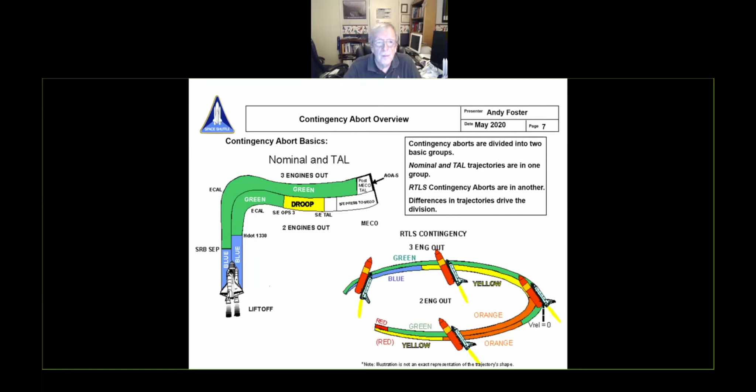Okay, so what I want to talk about now is there were basic objectives for each contingency abort maneuver. Every one of them that you'll look at will either have all of these things in it or most of these things in it. So the first one is for the two engine out cases. You try to use the thrust on the remaining engine to essentially optimize the resulting entry and recover the orbiter. And I say recover the orbiter if it was possible. And we'll talk about when that was.

So you use the thrust in some fashion to either give you a better entry, even if it was going to result in a bailout, or we would use it to try to get us over to a landing site later on in the program. The other thing that would always happen, you had tons of OMS propellant on board, full load you were going to carry to orbit. You wanted to get rid of that for two reasons.

Number one, it would pull the orbiter center of gravity really far aft and actually make the pull-out problem really, really bad. The flight control system wouldn't be able to handle it if your center of gravity was too far toward the back. And so one of the ways to move your CG forward and getting it into a good range for controllability was to dump all that OMS propellant, and we'll talk more about that in a few minutes.

Of course, the number one thing after that is separate from the tank as safely as possible. Especially with some of the three engine out stuff that wasn't always guaranteed, but we really tried to make sure that we got away from the tank and there was no collision. And then of course, depending on where you were in the sky and what had happened to you, you had some kind of resulting trajectory, which could be anything from not too bad to really terrible. And you had to pull out from that and then fly the orbiter to a landing.

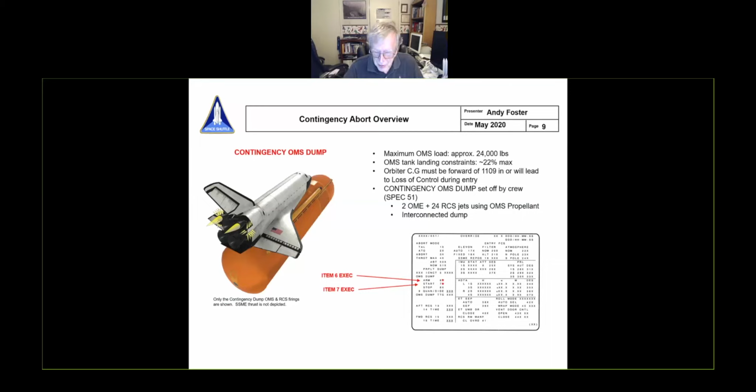Now, this picture over here is really kind of a 2-engine case, but I didn't put the SSME on here just because I wanted you to see the contingency dump and how it's going. And so again, this is really not propulsive. It may be helping you a little bit. It's really to get the weight off the orbiter and to get the center of gravity in the right place. So that's the contingency stuff.

Well, how does that work? If you stop and think about it, the center of gravity for the vehicle is actually down here in the tank. So if I apply a torque here, up, down, however these fire, I can make the vehicle roll around that center of gravity. So it was always essential that you got single engine roll control set if you were in a 2-engine case, and this is one of the reasons why it had to use this kind of a scheme to make it all work.

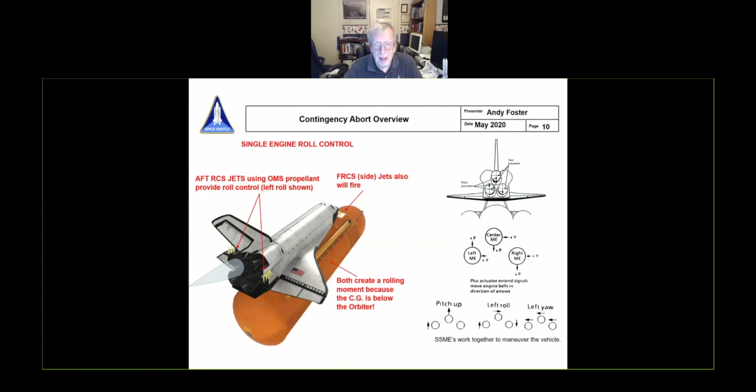Okay, so we're going to start with 2 engines out because those are the only ones that you can really affect any of the trajectory on. And just from a basic big picture standpoint, looking at the nominal type trajectory, there were 2 basic approaches. For the early engine outs, you need to get higher, and you need to do that partially to get the Q bar down low so you could separate off safely, and the other thing was to give more space, if you will, to enter. But the real thing was the Q bar itself.

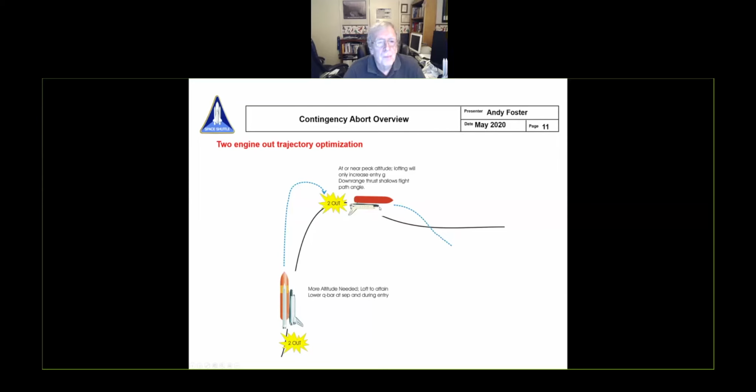And so what we did, and you'll see this in the manual procedures, but this is what the automation did as well. And actually, I'll tell you that when we automated the 2-engine out stuff, all we really did was take the manual procedures and put them in software. They really didn't put a lot of analysis trying to see if they could tweak anything. They just automated it. The 3-engine out, they took a different approach, and it's a lot more fancy and smarter than the 2-engine out scheme.

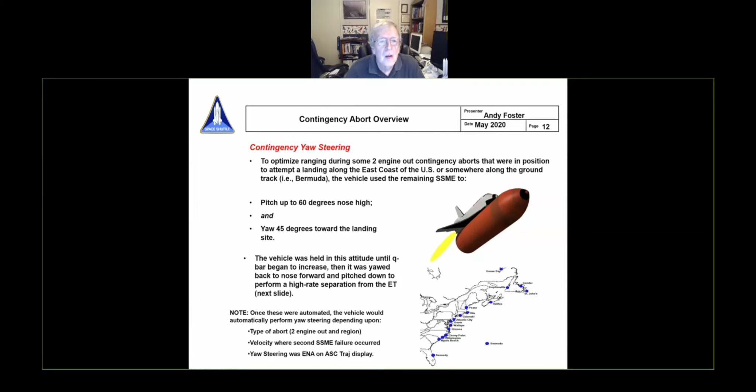ET SEP. There were 2 types of separation techniques that we used for contingency aborts. Now, we talked about the RTLS and using an alpha -2 SEP, and you'll see that we actually brought that over and used it for the contingency aborts. But we also have another one, because some of these contingency aborts would happen in regimes where Q bar was less than the 2 pounds per square foot that you really needed to get the tank off the vehicle using aerodynamic force. And so what we would do with that one is we still had a running main engine, and we would literally pitch forward at 4 degrees per second. And once that was established, the crew would punch the fast SEP switch, which would shut the main engines down and then pop the tank off.

And so really a good analogy of that is we were literally just kind of pitching the tank off using inertia to get the tank away from the vehicle, because as soon as the orbiter comes off, the RCS jets are going to start firing and pushing it away. And hopefully the tank goes on its merry way and it doesn't hit you. The other type of separation when we had Q bars that were 2 or higher was just to pitch down and hold alpha -2, shut the engine down, SEP off, just like we would for an RTLS.

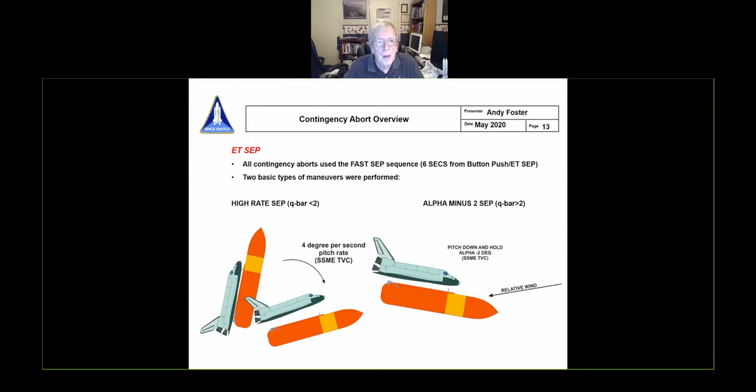Once I've got the tank off, just like an RTLS, the next thing you're going to try to do is pitch the nose up to a high angle of attack to recover lift as quickly as possible. Now, because we're in a contingency case and because we're dealing with much higher flight path angles and aerodynamic forces and G levels, we're going to try to recover lift a little faster than we do for RTLS. So we actually, depending on the Mach number, would pitch up as high as 58 degrees. And again, it might pitch a little bit lower than that. It was Mach number dependent on exactly where it would go.

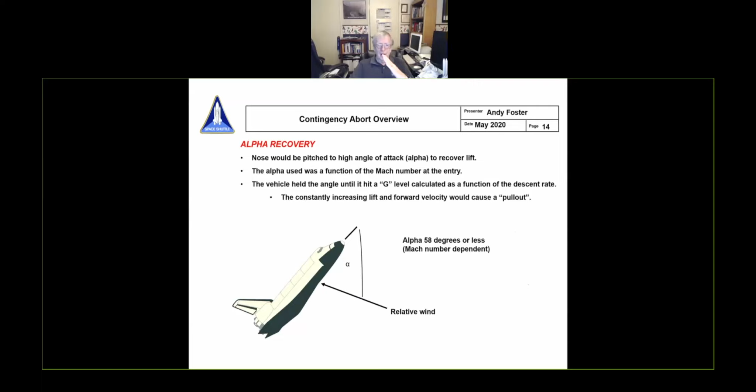But you'd pitch up and you just simply hold that alpha. And as the orbiter started falling into the atmosphere, lift would start increasing. That would automatically start kind of a pull out, and the G levels would start going up.

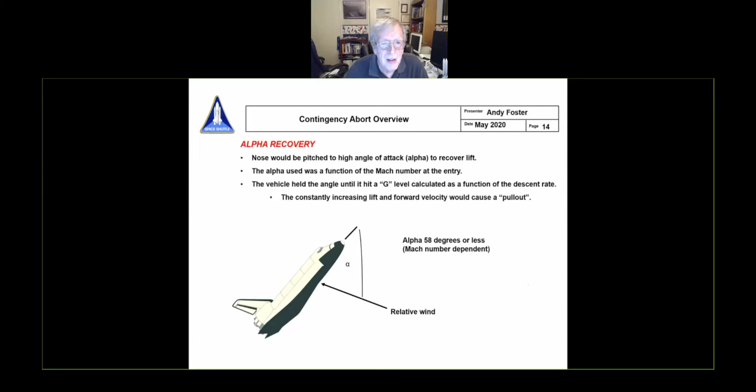And so once the G level hit whatever you were going to use for a maximum value, and actually the vehicle calculated that, at 1 G, it snapshotted how fast you were falling. We call that the altitude rate, or H dot. And it would essentially calculate from that the G level that it was going to use for the pullout.

It would pick the highest one that it could. If it's picking a high number, it's probably going to tell you that you're also going to have a lot of Q bar as well, because you wouldn't be pulling that much G if you didn't have to. And that's the trade-off that you always make. If you pull more G, you're trying to use up more of that aerodynamic force and put less load on the vehicle from an aerodynamic standpoint.

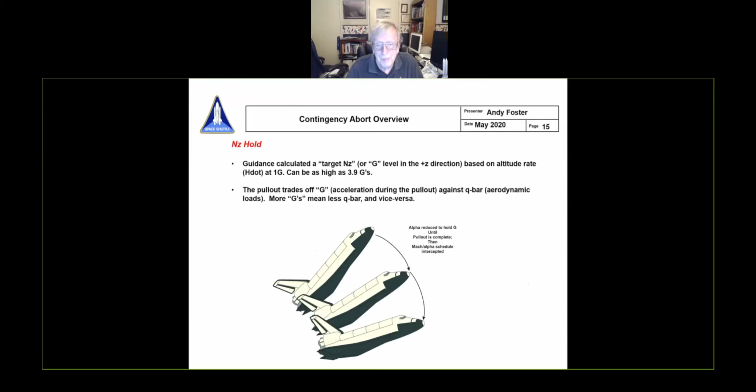If I use less G, well, I'm going to put less structural loading from G acceleration on the vehicle, or G loading, but I'm going to take more aerodynamic loading. And so that's the trade-off you're making through these. And if you get lucky, you don't hit the max G level and you don't go past the max Q bar, and you actually get through the regime. And then once you get outside of that, it flies an angle of attack that's a function of Mach number.

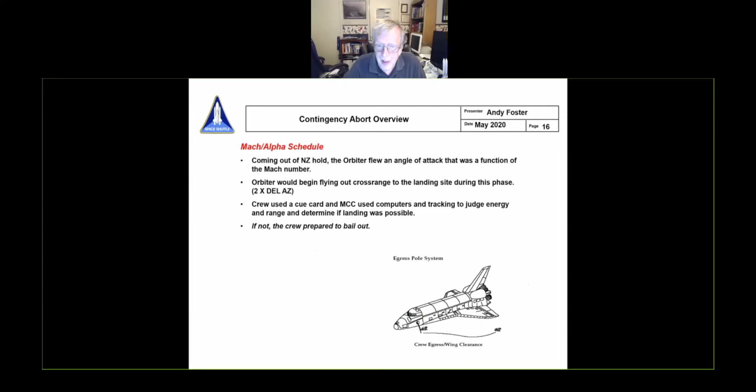And then the other thing too is you generally would have to fly out some cross range. And so what you would do is you would essentially look at how far off the nose it was, and then roll into a bank angle that was twice that. So if, for instance, my landing site was 30 degrees off the nose, I'm going to roll into a 60-degree angle of bank toward that landing site, and I'm just going to play that delta azimuth all the way until I finally, hopefully, take all the cross range out, and I'm essentially about wings level again.

How did the crew know whether or not they were going to make it? There was a cue card they had in the cockpit that essentially told them whether they were high or low energy, were you on range or not. And then MCC, of course, was using actual tracking telemetry data and computers to calculate the energy and the range and help determine if the landing was possible. And if they didn't think you were going to make it, they were going to tell you to prepare to bail out. I'm not going into detail on the bailout system, but I'll talk a little bit about the bailout autopilot here in a little bit.

The idea was to put the orbiter into a glide down here in the bottom right. You can see you blow the side hatch, you extend this pole. The crew actually would have chutes on, they'd hook up to this pole, and then they would just essentially jump out the hatch. They had a little attachment that would keep them on the pole till it spit them out. And the sole purpose of this pole was to get them down below the wing when it released them, so they wouldn't come up and hit the wing after they jumped out of the hatch, which probably would normally happen. Okay.

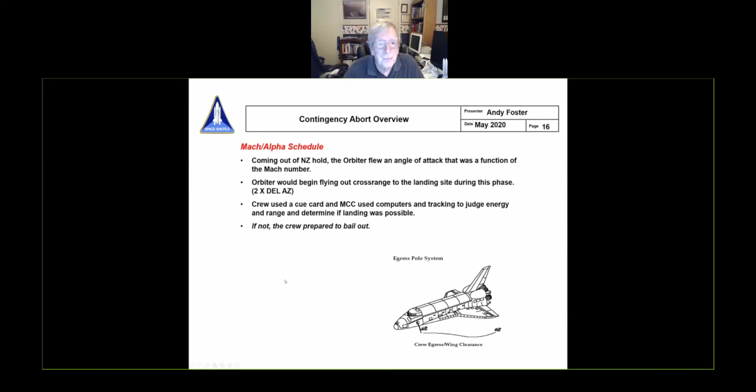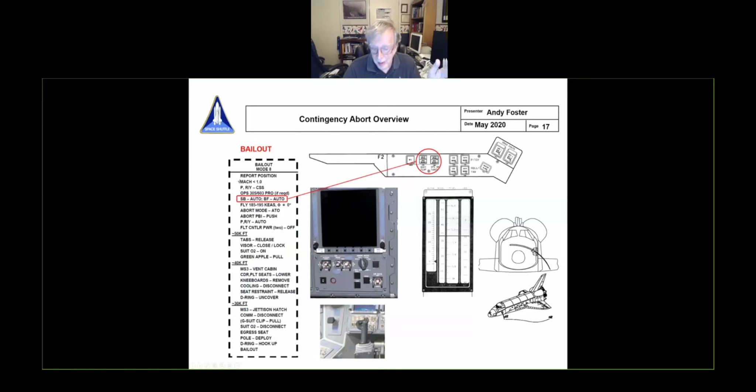Okay, so the very first thing that you had to do, you had to fly yourself so that you got below Mach 1. And once you did that, you went pitch roll and CSS up here, and you're manually flying, and you make sure you're in Ops 305 if you're not already there. And then first thing you want to do is make sure the body flap and the speed brake are in auto, so you don't have to mess with it, and they're going to keep the vehicle stable. The whole purpose of this thing is to be in a stable glide at about 190 knots, somewhere between 185 and 195.

And what you see here to the right of that is a phi 0, so you want to be wings level. That's what that's telling you. And then once you were there, the next thing you would do is rotate the abort rotary to the ATO position and push the abort PBI.

And when you did that, the autopilot for bailout would be engaged. And then once you had it engaged, you would essentially go back to auto so that it would hold the vehicle for you. And then this is the flight controller power controls, the RHC and actually THC.

But the reason that the pilot and commander are both going to turn that off is so they don't kick it on the way out, because if they do, they run the risk of kicking the flight control system back into CSS. That's manual steering, and the idea right here is you're leaving, so there's not going to be anybody to manually steer, and you don't want to do that. So you turn the flight control system power off so you can't accidentally kick the system back out when you want it to work.

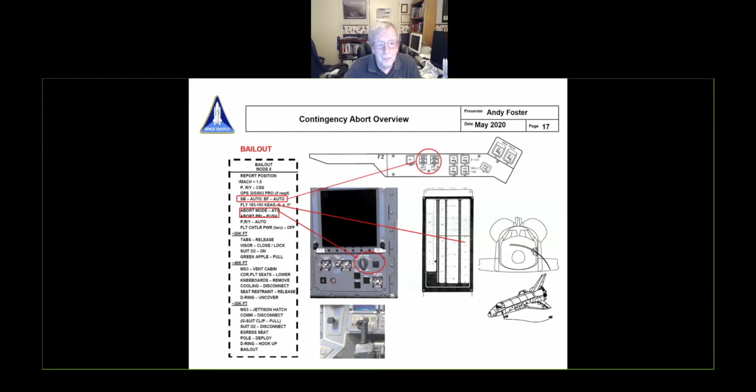Okay, that's 2-engine out in a nutshell. So any questions about any of that?

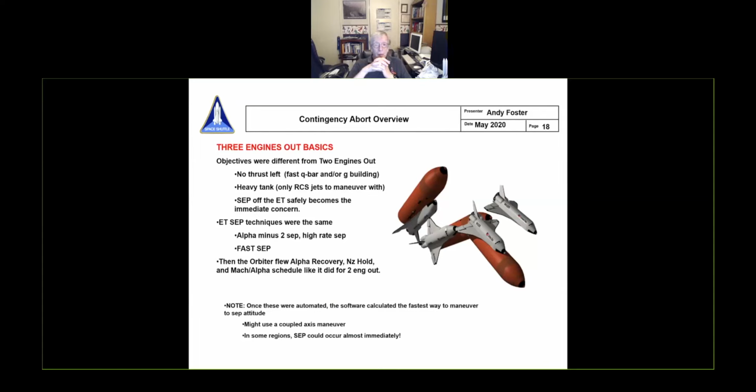So, okay, for 3 engines out, of course, the big difference is I don't have another engine to do anything with, right? So you're kind of stuck with what you got. No thrust left, and that means for most of the regimes, you start falling into the atmosphere fairly quickly. The Q bars are going to start rising, and the G is going to start rising. You have a very heavy tank, and the only thing you have left to maneuver with are the RCS jets.

Now, believe it or not, you could muscle this thing around for every scenario I was involved with. It might not be great, might take you a little while to get over, but you could actually, even if you were heads down, roll it heads up, and then do what you need to do. And then, of course, you want to get off the tank as quickly as you can, as safely as you can. We still had the same techniques.

The alpha-2 SEP was kind of dicey, but the high rate SEP, or fast SEP, which I'll explain in a minute, was always used in every contingency abort. Essentially, it was a really fast separation from the external tank compared to what would normally happen. And then again, the pullouts, NZ hold, Mach alpha schedule are exactly the same as they are for 2-engine out.

So the big difference here is, and we'll take a look at some of these maneuvers because they're kind of interesting, that you have the RCS jets. Everything's done on the RCS jets. Controllability is not as good. You can't move the orbiter as fast.

And if that should tell you anything, it's that if you're in a 3-engine out contingency abort, and especially if you're flying it manually, the crew has to be on top of it, and they have to be moving very quickly to get it all done. You don't have time for any confusion, anything like that. You just got to get on it and get it done, and then do the best you can.

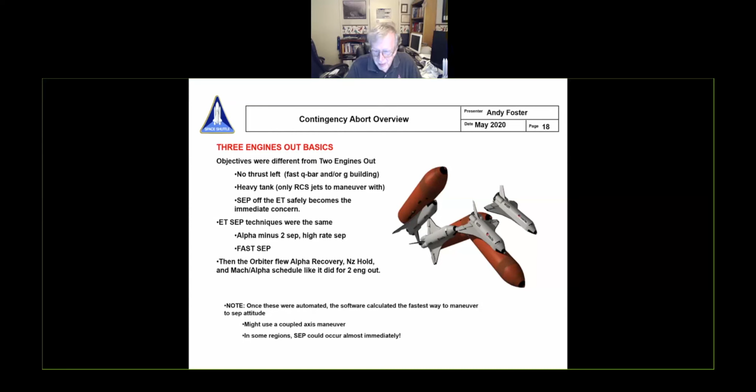Okay. I'm going to stop right here, and we're going to come back. Let's take 5 minutes out for a bathroom and water break. And then we'll come back because it'll probably take us another 20 or 30 minutes to go through the rest of that. Okay?